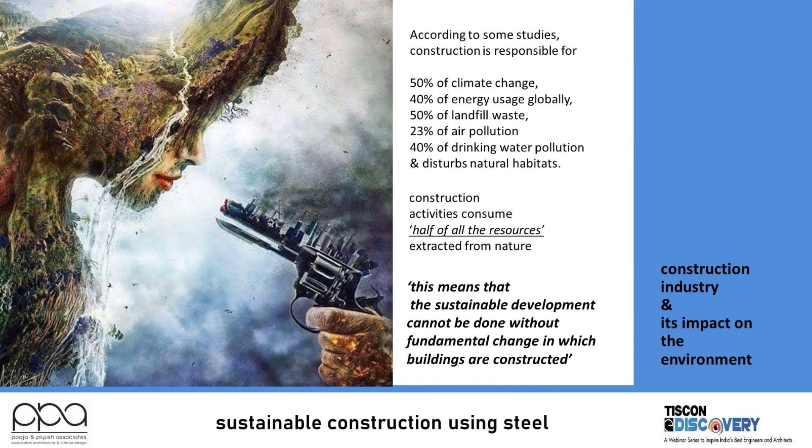According to some studies, building construction is responsible for 50% of climate change. More than 40% of energy is used by buildings globally. Buildings generate as much as 50% of construction waste that ends up as landfill. Construction activity creates 23% of air pollution, pollutes 40% of drinking water, and disturbs natural habitat. Moreover, construction activities consume half of all natural resources extracted from nature. This means that sustainable development cannot be achieved without a fundamental change in the way buildings are constructed.

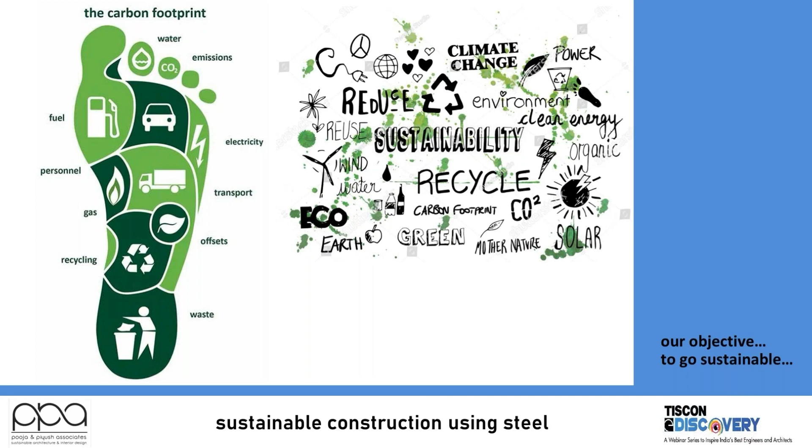Today, I am delighted to inform you that we at Pooja and Piyush Associates are leading our way in developing a more sustainable construction industry. Our objective overall is to reduce the carbon footprint of buildings. Let us examine the three biggest challenges for the construction industries in India. Number one is shortage of labor. Workers in construction are aging out and retiring at a faster rate.

The younger generation is not coming due to urbanization, as one can also earn a living without undergoing much hardship. The labor shortage has reduced productivity. Workers do not have the skill nor the experience needed. Contractors and builders try to do more work with fewer workers, which affects the quality of workmanship and productivity.

Second factor is safety. The number of workplace injuries and illnesses have remained constant for years. Keeping workers safe and protecting them against accidents and injuries should be top priority for all business owners. Post-COVID, workers and workplaces need additional care, and their health and hygiene have become a priority.

Third, what we see is the construction industry as a whole is very slow in adapting to new technologies. Companies that are early adapters and are implementing new technologies are going to have a noticeable advantage over those who don't. This is all resulting in delayed construction, increased cost, and further complications. So how do we build?

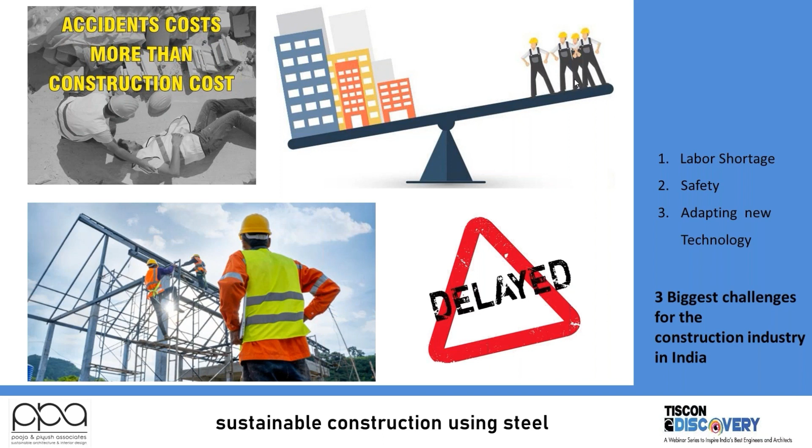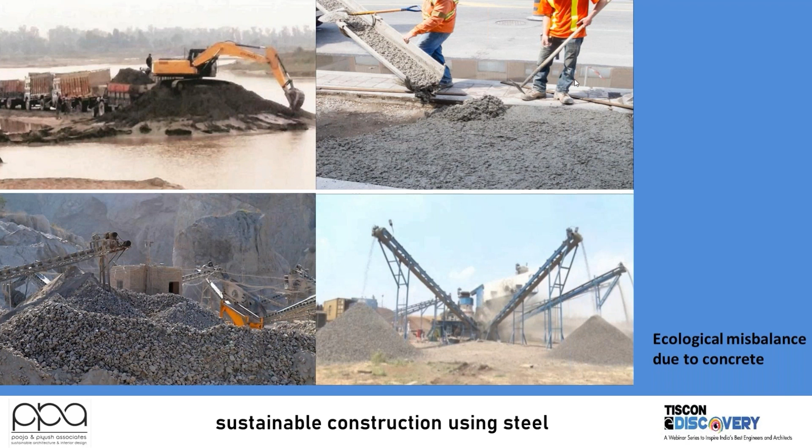Unfortunately, concrete is not an environmentally friendly material, either to make, to use, or to dispose of. A lot of energy and water is used to gain raw materials to make concrete. Quarrying of sand and aggregates causes environmental destruction and pollution. Today, we are witnessing constant delays in handing over sites due to either labor issues, raised cost of construction, or shortage of material supply at times.

So how do we build a structure that is eco-friendly, ecological, sustainable, beneficial and non-harmful to the environment, and resource efficient? Building vernacular, apart from bamboo, precast concrete, reclaimed wood and adobe, steel today has emerged as a sustainable material.

Presently, human civilization has entered the fourth generation of innovation: discovery of machines in the first phase, discovery of electricity in the second phase, and discovery of internet in the third phase. In the present phase, some innovations of advanced technology already popular abroad could be well suited for application to the Indian scenario. Steel-concrete composite design and construction method is one such method that combines the beneficial properties of both steel and concrete.

Here, concrete is optimally used, thereby reducing the material cost and saving construction time. Steel is one of the best materials used in construction for buildings to withstand extreme forces like strong winds and earthquakes. In combination with concrete, steel can be used for columns, beams, deck slabs, as well as staircases to make the entire building.

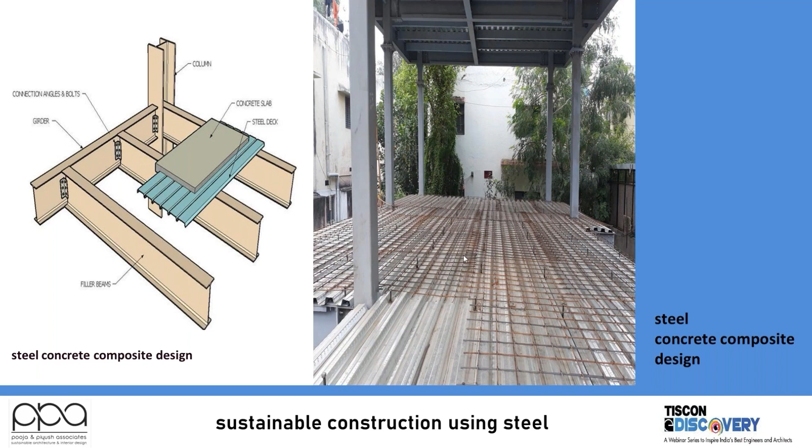Steel is tensile. It has high strength to weight ratio, which means it has high strength per unit mass. So no matter how long or large the overall structure is, the steel sections can be small and lightweight, unlike other building materials. Steel can be easily fabricated and produced massively. Steel sections can be produced off-site at the shop floor and then assembled on site, which saves time and increases the efficiency of the overall construction process.

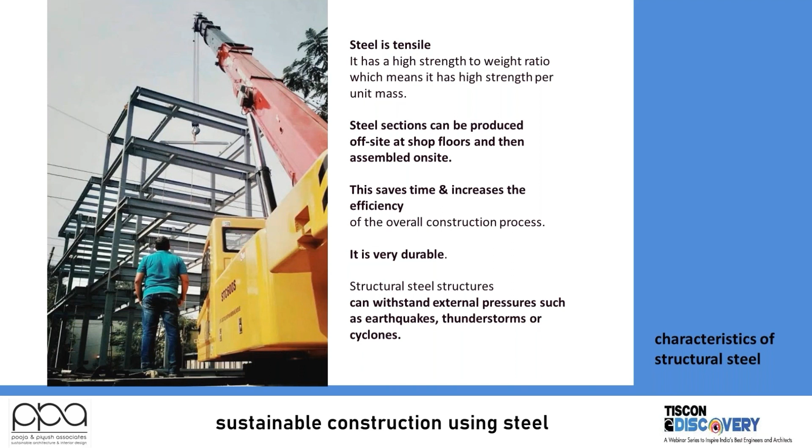Structural steel is very flexible. You can mold it to any shape without changing its properties. You can convert it into sheets or turn it into wires as per the design. Structural steel is relatively cheap compared to other building materials, and hence it is very durable. It can also withstand external pressures such as earthquakes, thunderstorms, and cyclones. A well-maintained structure can last more than 60 to 80 years.

We have reliability. The nature of steel is industrial, which offers speed in construction, uniformity, durability, high performance, elasticity, ductility, and warning before failure. Steel structures always give a warning - they will either bend or they will sag. So they always have a warning before failure.

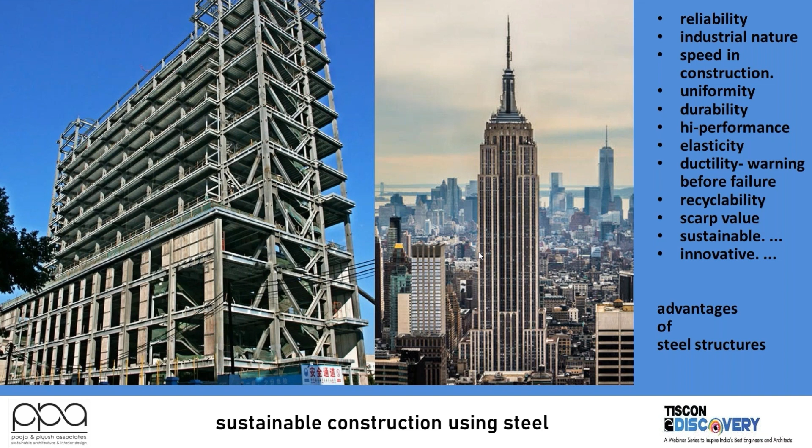Steel material is recyclable, so there is a recyclability factor and you always have a scrap value to it, and this makes for a sustainable and innovative advantage to all steel structures. Sustainable construction is a part where you see the structure's impact socially, environmentally, and economically, and in all three factors, steel is compatible.

However, there are some limitations in steel structures. We have to complete the entire planning, and additional time goes into design. The time required to design connections is more as compared to RCC structures. Cost is high for structural steel as compared to concrete structures. You require skilled laborers, and extensive fireproofing cost is involved as steel is not fireproof.

Nowadays, JSW has come up with fire retardant steel as well. In high temperature, steel loses its properties and can soften and melt with exposure to extreme temperature.

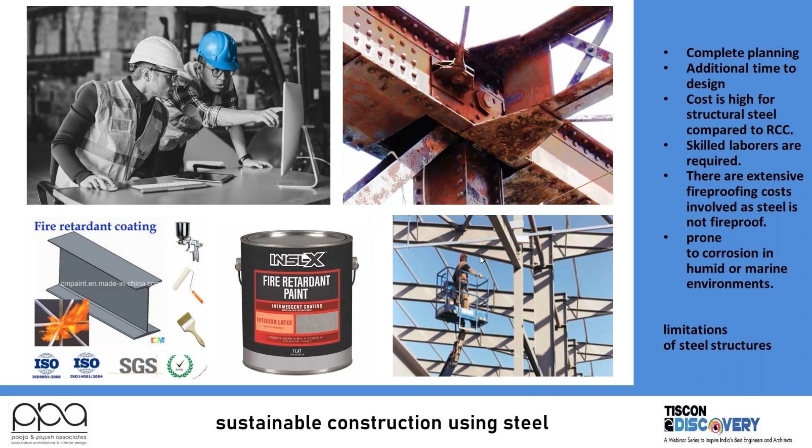As the old saying goes, time is money, it was never more true than when we talk about construction schedules. In any construction, economy and time are crucial factors, and as per building needs, the method of construction is decided, whether RCC or steel structure. I will be presenting a few case studies.

It is a house for two brothers where we had to create a minimal house that used innovative construction technology, where the use of material is showcased in its true form. It's ecological, sustainable, and climatically responsive. Above all, it had to represent or showcase an architect's own house.

Thus, the design concept started with a search for a perfect building and a meaningful house with more meaningful spaces, in search to be true and pure. We have this as a plot with two sides roads.

The entire design was as per the sun path diagram, where you see the movement of the sun. The wind direction in the daytime is from the northeast, whereas in the evenings it is from the southwest.

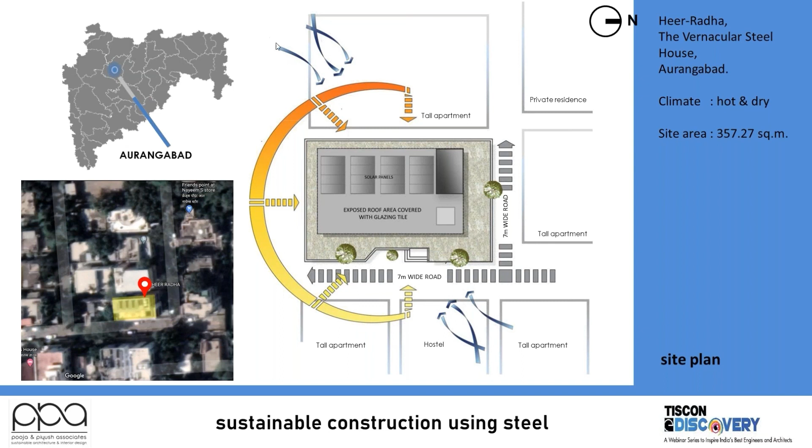The plan was an effortless, simple rectangle with relaxed spaces and non-defining spaces. It was minimal on material, be it for construction, interior, or finishing.

We have a rectangle with a staircase block on the northwest side. The living or public areas, which have the living room, kitchen, and dining area, shown in yellow, are on the front, eastern side, and the private bedrooms are on the western side.

The entire house has a veranda, balcony, or terrace on all four sides. These are the green spaces or buffer spaces, which act as buffer zones.

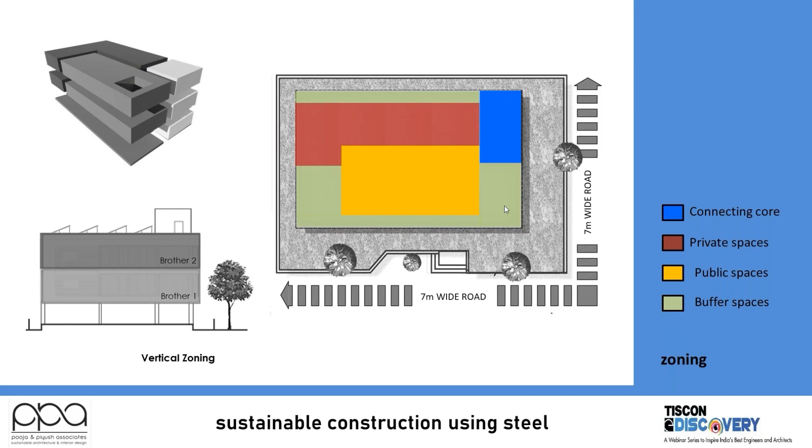The entire plan is a rectangle. You have the living room, dining, and kitchen on the eastern side, with balcony spaces, and you're greeted with an open terrace. All the bedrooms are on the western side, where you get the wind flow.

There are no internal walls. The furniture becomes part of the structure and divides the spaces between the bedrooms and living rooms. The orange blocks that you see are hollow clay blocks, which insulate the entire house from exterior weather conditions.

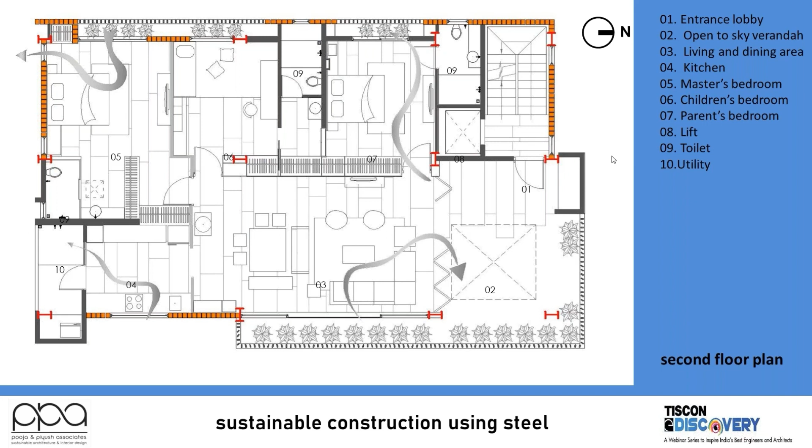In search of innovative building technologies, the steel composite structure was a strong magnet, the first of its kind in this region. The conceptual development revolved around the mixed use of vernacular materials with a steel composite structure.

The entire structure was erected in 5 to 7 days, and later we cast the slabs on each floor. So the entire building was completed in 2.5 months.

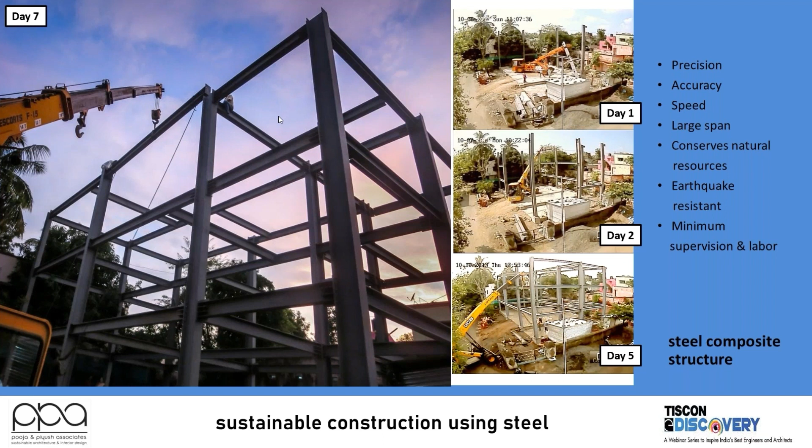These are a few shots of the steel composite structure while the erection was happening. All the members were fabricated in the factory and assembled on site.

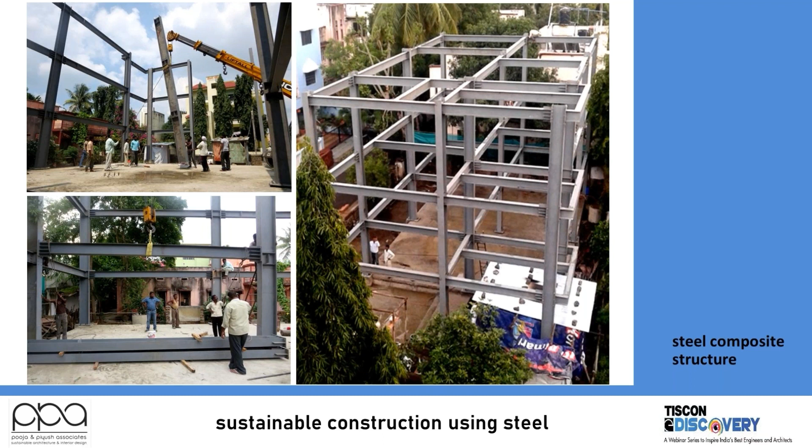The speed of building, flexibility, large spans for spaces, precision in work, and conservation of natural resources, construction material, human labor, and energy were a few strong advantages of the composite structure over conventional ones.

This is the front elevation of the entire building. These are the aluminum fins that you see in the front. This is the northeast elevation.

From northwest to southeast, we have the clay blocks, which insulate the entire building from harsh weathering conditions. The aluminum fins not only obstruct the view but also create a tangible elevation. They offer privacy, reduce glare inside, reduce the radiation of the sun, and replace conventional grills.

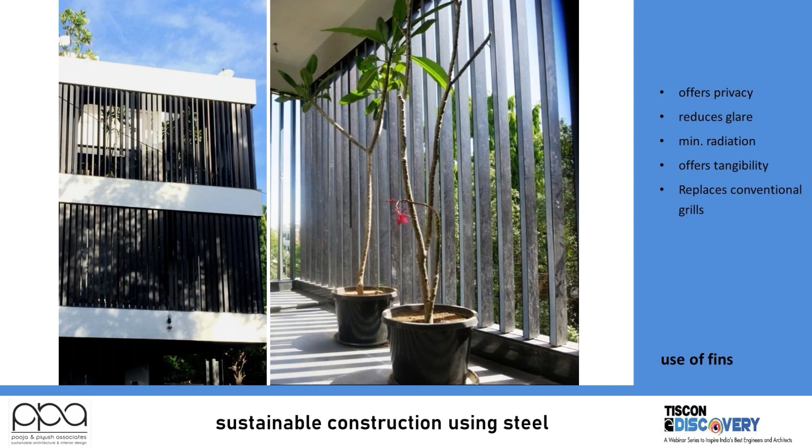The clay blocks are used for the external walls. They have high compressive strength, good thermal and sound insulation, are 100% natural and sustainable, durable, cost efficient, and low on maintenance.

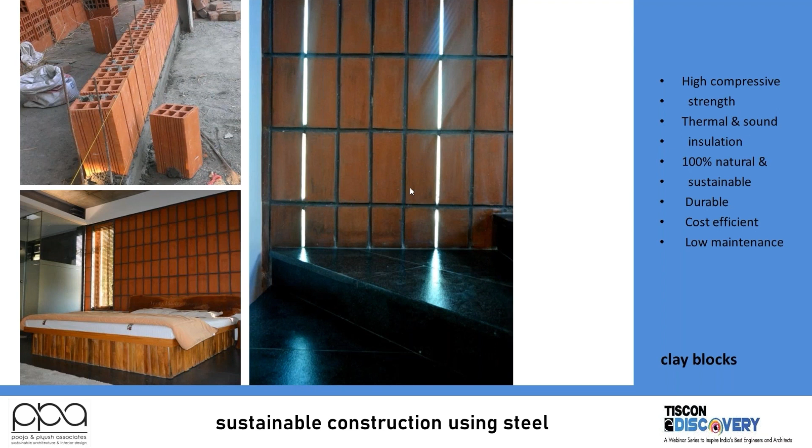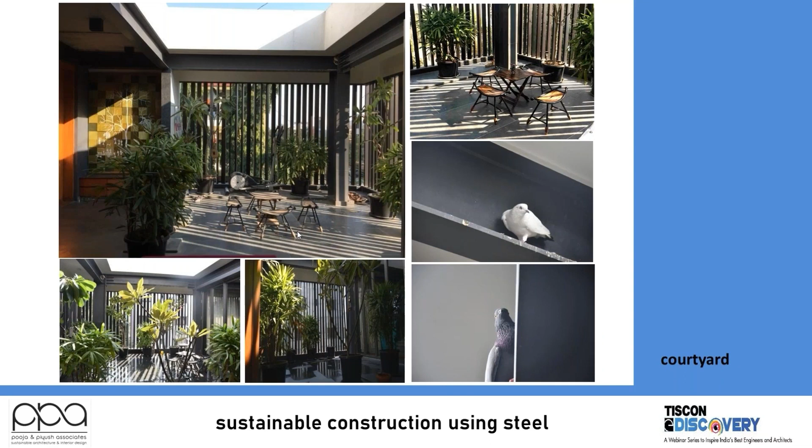A few shots of the interiors, where you see the space becomes one and interacts with nature. This is the entrance courtyard, which brings in light and nature inside.

After designing this entire house, the innovations we saw: we did not have any lintels, chajjas, or grills. There was no false ceiling. There were minimum walls, minimum plaster, and we saved almost more than 55% of natural resources as compared to a conventional RCC building. The total ventilation achieved was almost more than 86%, which saved almost 25% of electrical energy also.

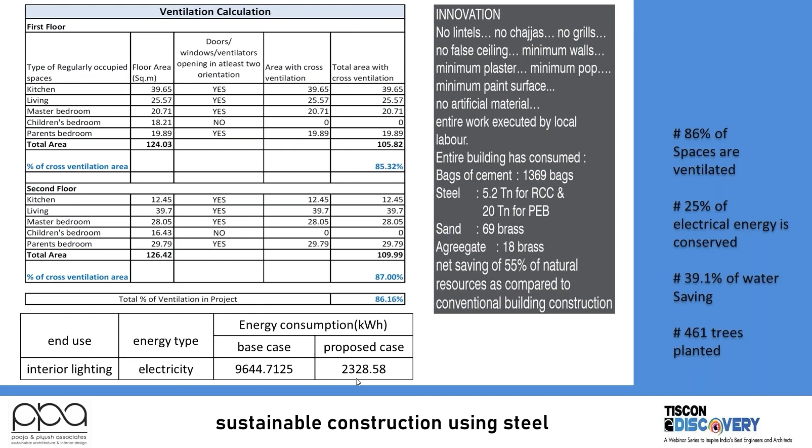The second structure is the Nuts and Bolts house at Aurangabad. This house was designed for a family, for an LIC agent who had bought a small plot of almost 2000 square feet in the heart of the city and wanted to build a small house with basic requirements of 3 bedrooms and a home office. The one thing he aspired was to build fast.

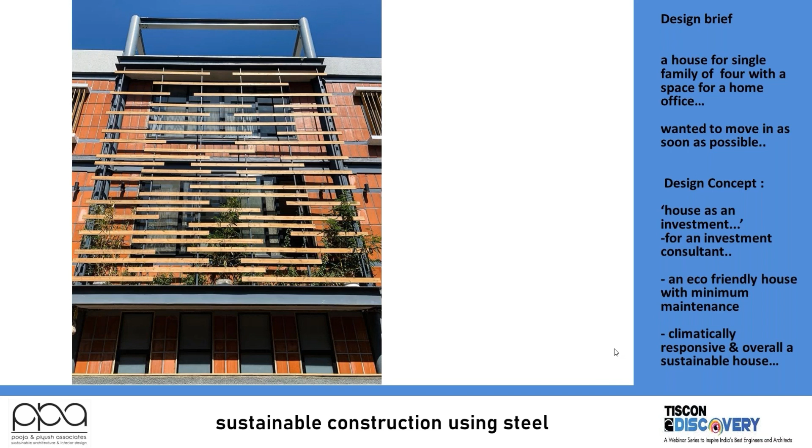This house was designed for 3 floor plates of 1000 square feet each with an open plan. Since the house was for an investment consultant, we proposed to build it in steel. Again, we followed the basic principles of climatology: a north-facing plot with roads on 2 sides.

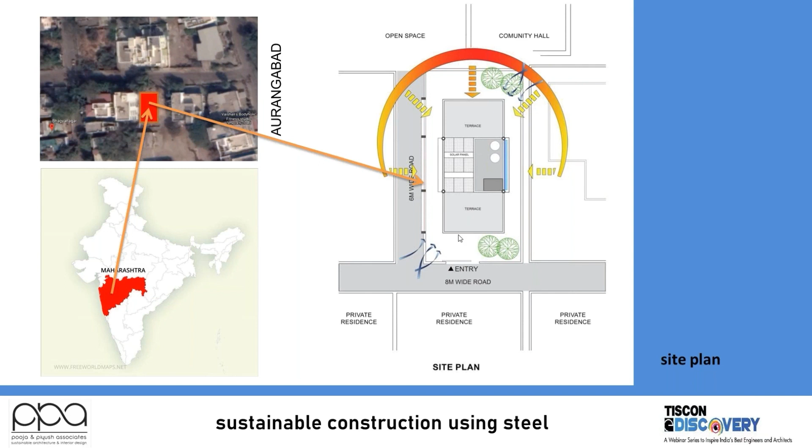So the sun path was like that, and the orientation of the building is north-south. On the eastern side, if you see the zoning, we divided the entire building into 3 zones: the bedroom zones and the living zone in the center. The living area in the center becomes the dynamic space, so there is no circulation space wasted. All the west is covered with services to insulate the entire building. The utility, toilets, lifts, and staircases are placed on the west, whereas all the living areas are placed on the east to get natural light.

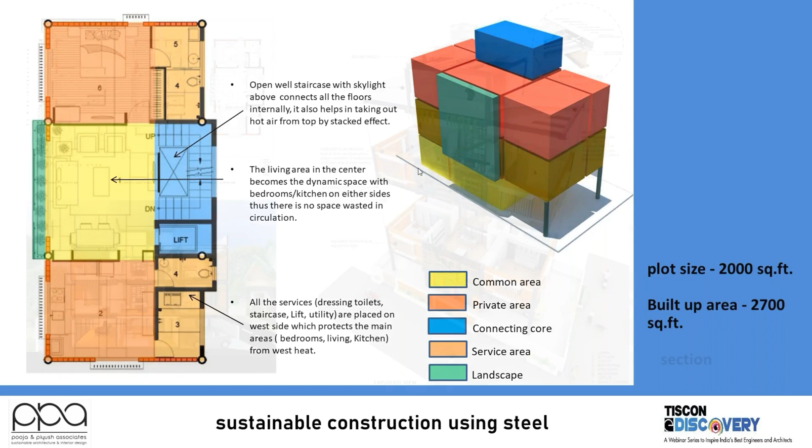The building is divided into 3 floor plates. On the ground floor, we have a formal living room with a home office. On the first floor, we have a living room with the parents' bedroom and kitchen dining. And on the second floor, we have 2 bedrooms with a family lounge. The staircase connects all the floors together with a skylight above, which exhausts all the hot air from the top.

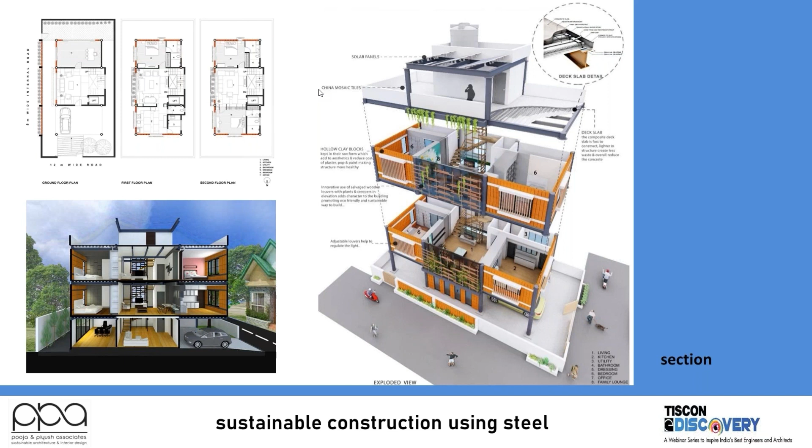The aim was to create architecture that would offer natural and healthy living spaces, that would be maintenance free, that would be built with maximum recyclable materials, and that would reduce the environmental impact.

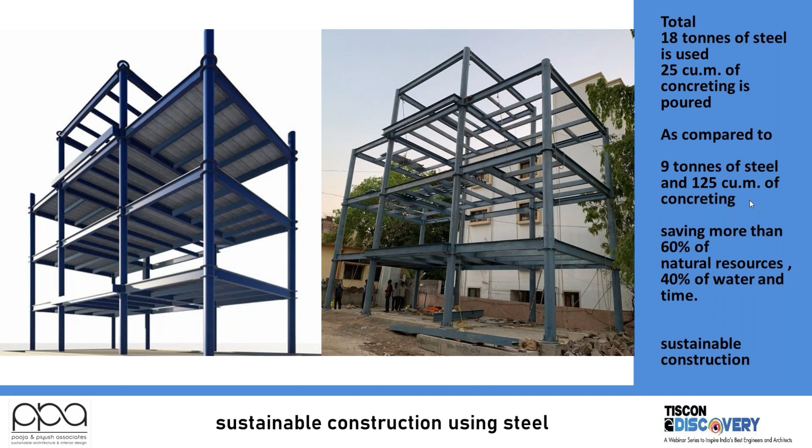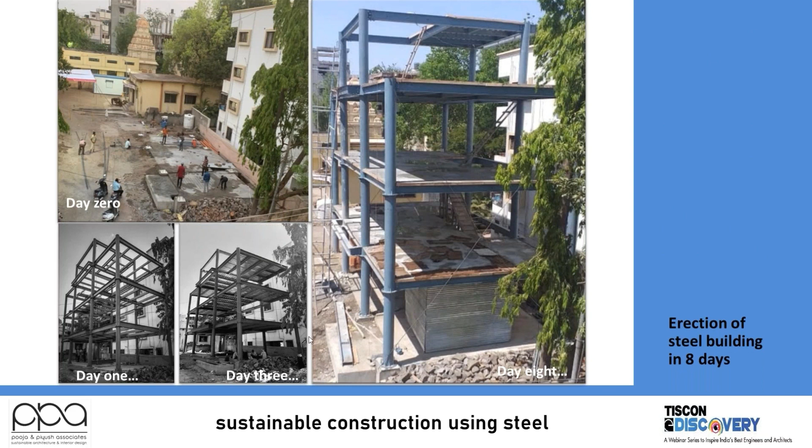On day 0, the plinth was erected. On day 1, you see the entire structure erected. On day 3, the entire structure was erected, including the deck sheets. And after 8 days, the entire structure was completed, including the slab.

The use of composite deck slab was used here, unlike the previous residence which was built almost 8 years back. So here we incorporated deck sheets, which offered speed. It was light in weight, thus reducing the weight of the building. It created less waste and was overall cost effective.

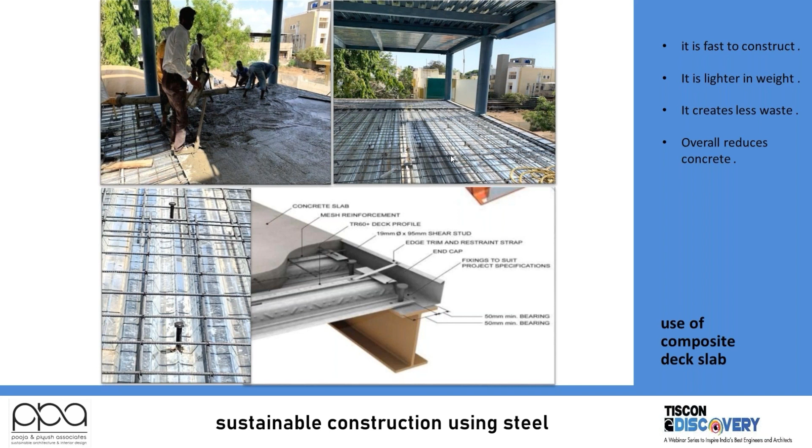Connection details of the structures were worked out in detail and incorporated looking at the interiors as well. This was the first ever such structure built in our region, and the design was again truthful. The design language was to create architecture that showcases its true form, whether color or texture, without adding any artificial layer.

The clay and steel with wooden louvers and green plants complemented each other and added a new vocabulary to the building. The external walls were designed with hollow clay blocks that created a temperature difference of almost 5 to 7 degrees, keeping the interior cool in summer and warm in winter. The vertical pattern of the blocks gave rich character to both interiors and exteriors.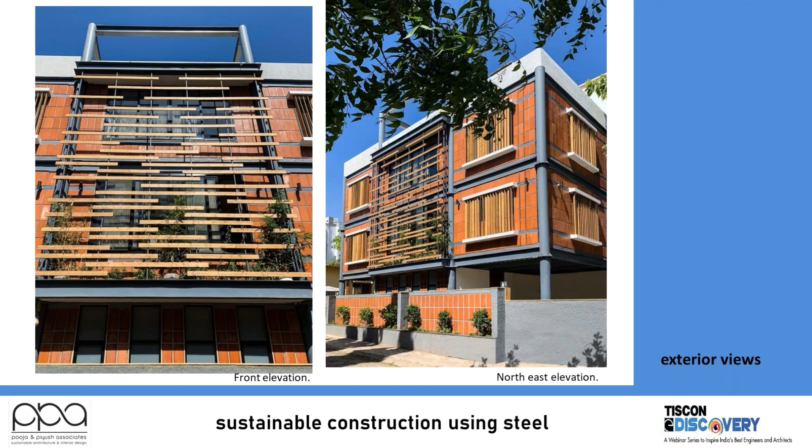The conventional grills were replaced by salvaged wooden louvers that helped regulate the light and connected you to nature. The interiors were designed with a color palette of natural materials. The terracotta walls, exposed deck floor with rafters in ceiling, and leather-finished Jaisalmer floor all showcase the concept of the design: to build and be pure. The furniture units were made out of MDF and PVC ply and painted in white and grey tones.

The open well staircase connected all 4 floors, and the green envelope added a unique character to the building, promoting an eco-friendly and sustainable way, offering a healthy lifestyle to the occupants.

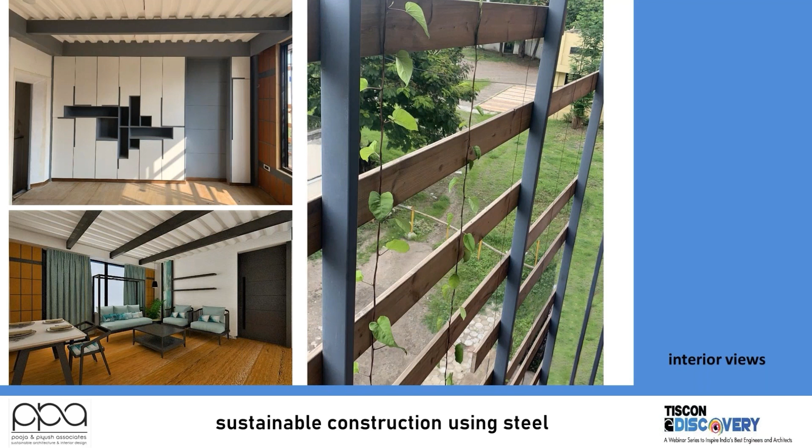I would showcase a few ongoing projects now. If time permits, I would show the time-lapse video of the bungalow that we erected, this nuts and bolts house. This is a residential and commercial building at Bajarang Chowk.

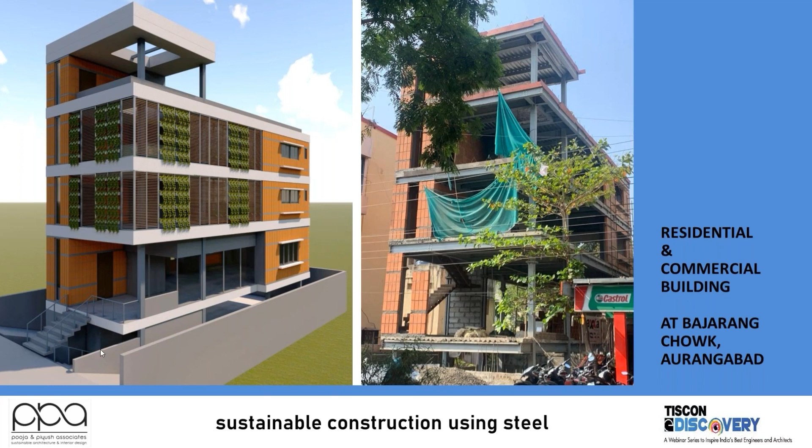Here, the 2 floors are commercial while the 2 floors above are residential. This is the ongoing site in Aurangabad itself, again almost on the same lines and same principles as the 2 houses. The 5 floor slabs that you see here are cast in a single day.

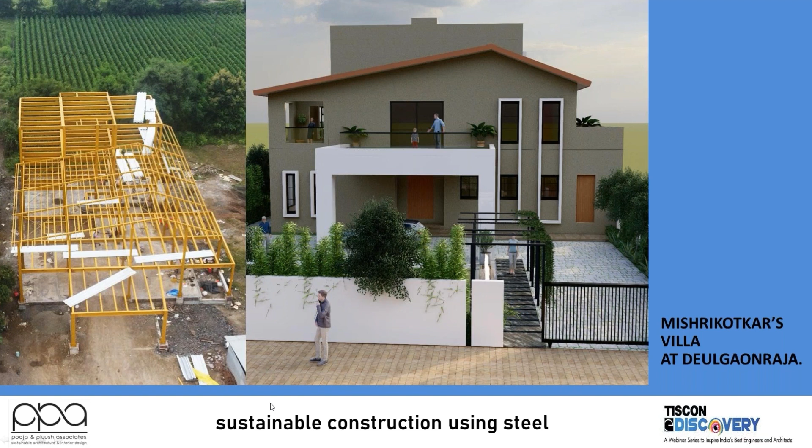This is the Mishrikotkar's villa at Deulgaonraja, almost a 15,000 square feet residence. Here the client did not want the steel structure to be seen, so all the external walls are in AAC blocks, aerated concrete blocks, with cavity walls, and the entire steel sections are sandwiched between the structure.

This is the plan where you have the living areas in front and the private areas on the rear side, with a courtyard and a puja room in the center. On the first floor we have 2 bedrooms with a home theater and a guest room with terraces, and on the top floor another daughter's bedroom.

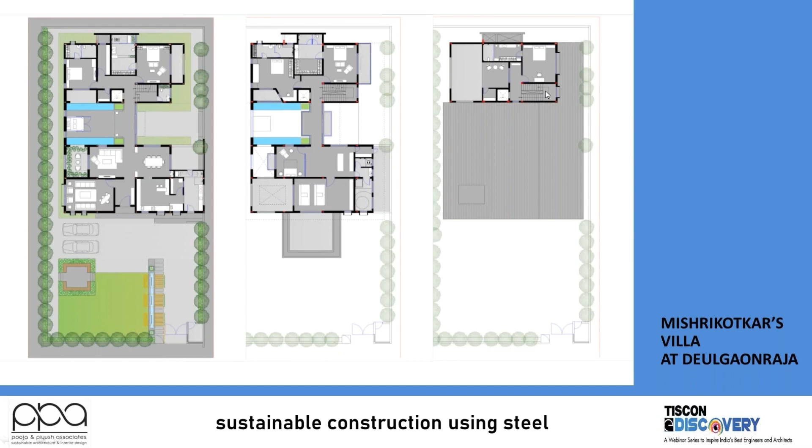This entire structure was erected in 2 weeks. The top floor has a sloping roof with Mangalore tiles on it. Here you see the cavity wall in between which insulates the entire house, and this is how the entire steel is enclosed, protecting it from all weather and not giving an industrial look to the building.

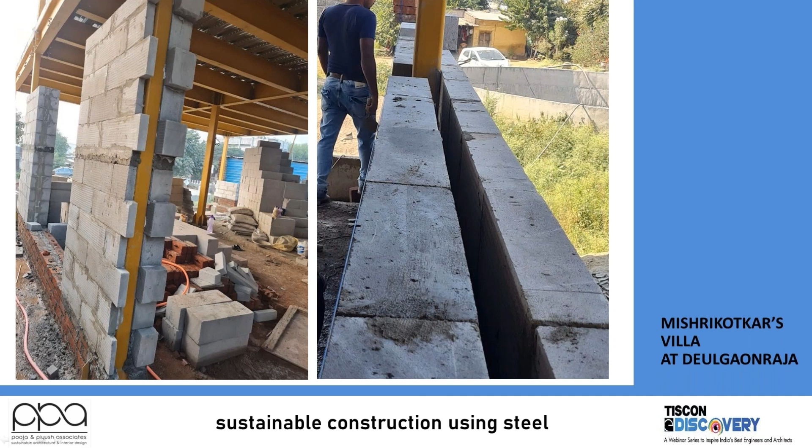This was like a villa. The entire design is as per the villa concept.

We also did a few projects. One of them was labor quarters at Gangapur, erected in almost 1.5 days. The entire steel used was hardly 3 tons, and we were able to construct almost 8 units.

After seeing the development, the client ordered another bay, so we erected this bay as well. Opposite to each other, 16 bays were all completed.

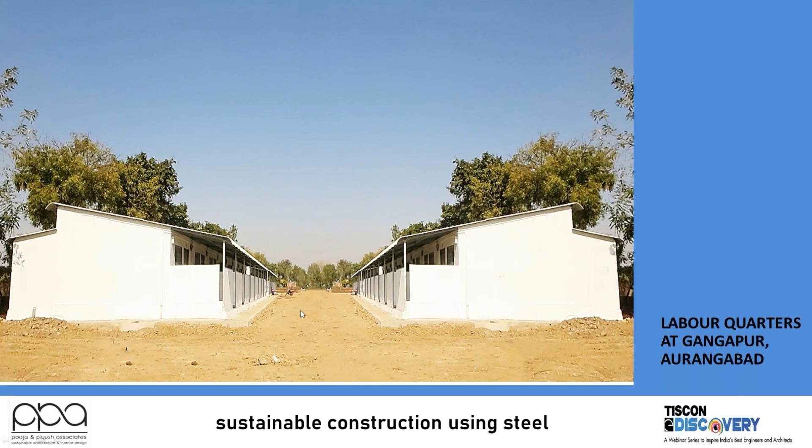Here we have all Aerocon blocks for the partitions. All these internal walls are erected in Aerocon partition, and we have a regular tin shed with a skylight, so the entire house is ventilated. You have a kitchen, an OTA, the living space, and the utility and toilet on the rear side.

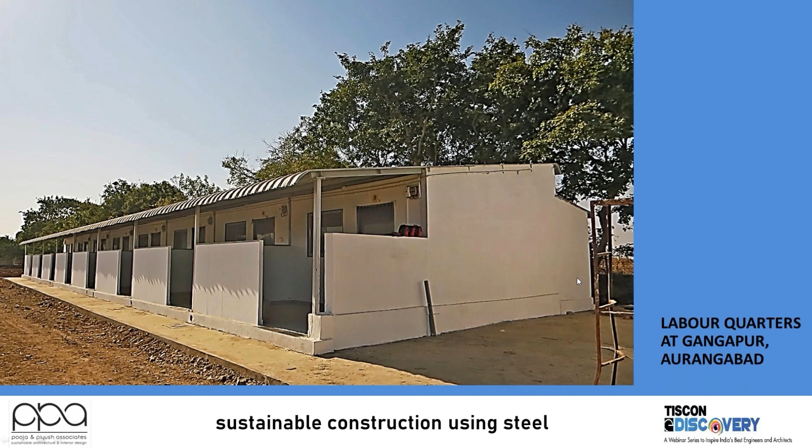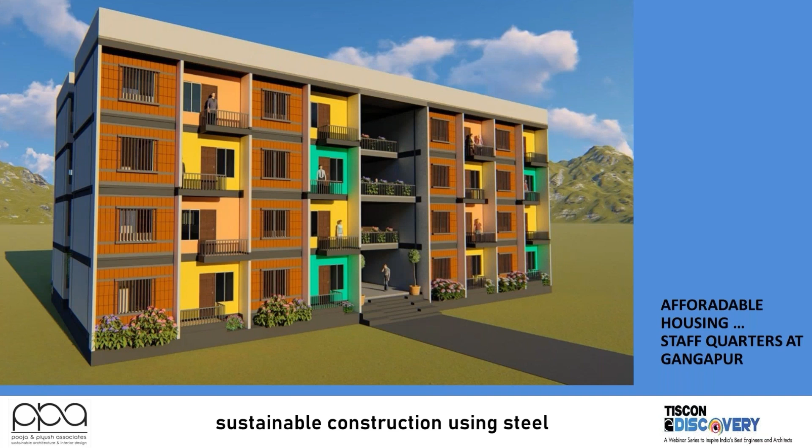Affordable housing for staff quarters was also worked out. Here we conserved, again, in this 25,000 square feet construction, saving more than 50% of natural resources.

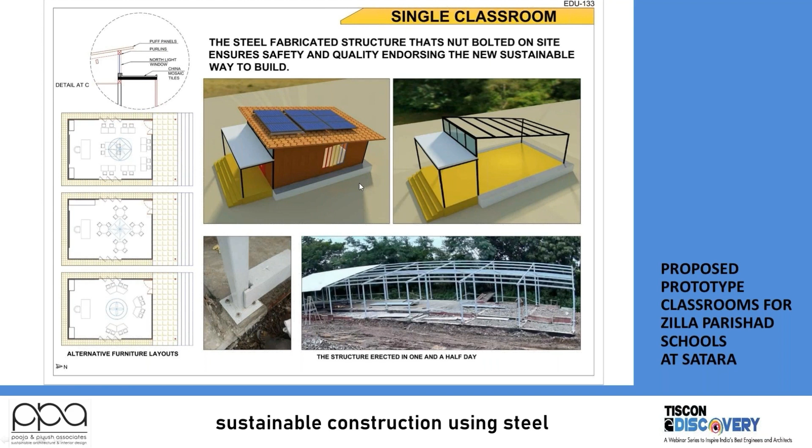We proposed the classrooms for Zilla Parishad schools at Satara on the same principles, where you can create a cluster of one shell with a veranda and a classroom with natural light coming inside.

For the first time, you see in the human psyche that we are adaptable to change. It would be interesting to see how we respond and how things move and transform from here again.

I hope to see a new tomorrow where we don't only design buildings, but we design communities. Let us dream to build healthy and livable cities that have clean air and less traffic, ones that are easy to commute, on bicycle or by walk.

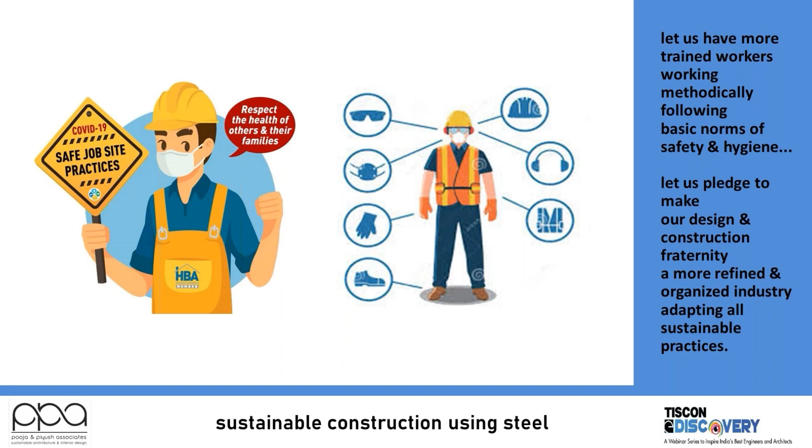Let us have more trained workers working methodically, following basic norms of safety and hygiene. Let us pledge to make our design and construction fraternity a more refined and organized industry, adapting to all sustainable practices, and let us change our preferences to materials and act responsibly. Let us do less, reduce the carbon footprint, and have a conscious approach.

If possible, I can run the video of the time lapse. Yes, Piyush, please go ahead.

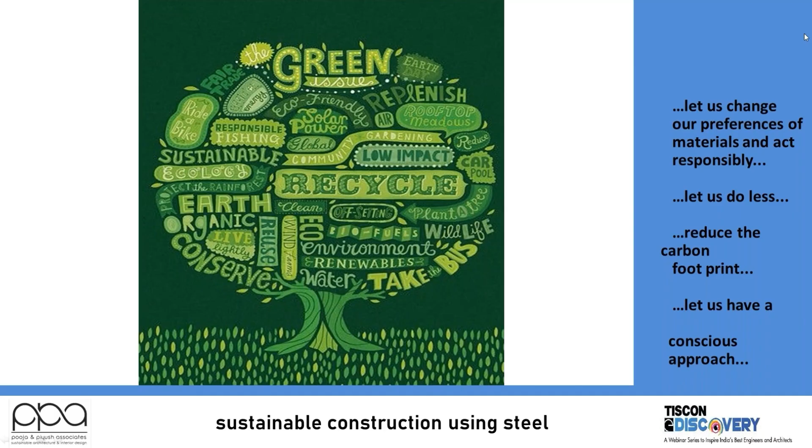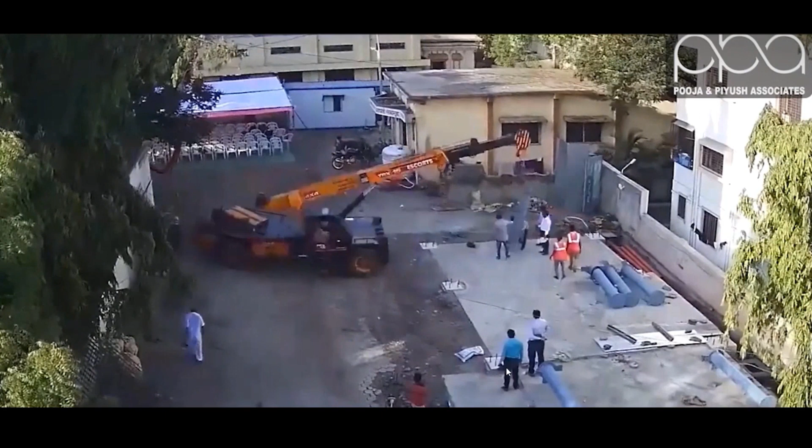So this residence was constructed in hardly 8 days. This was the plinth that was erected, and we had the anchor bolts already done on the site. On the first day, all the columns were erected, and all the beams were also erected.

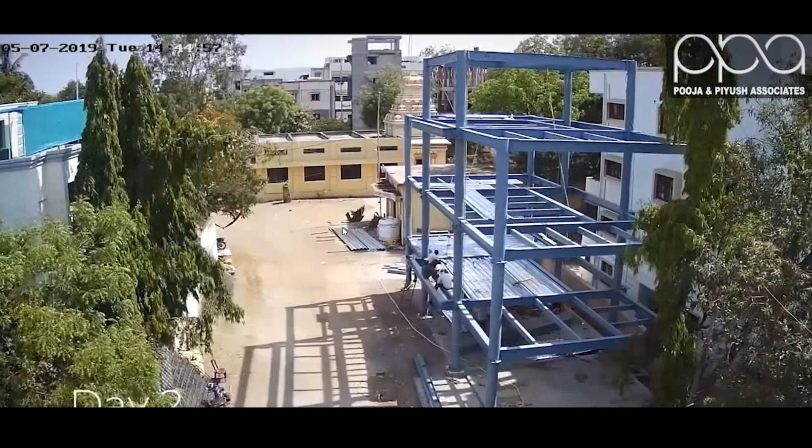Since we had two roads, there was freedom of accessing two cranes. These are the deck sheets that you lay on the structure. Circular columns were used because the entire structure was exposed, and we did not want to hide the columns.

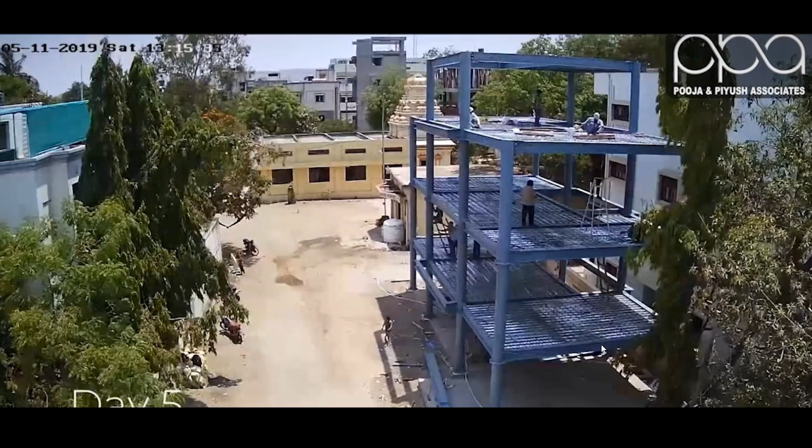We had basic reinforcement laid on the structure, then electrical conduits and all service lines were laid. The last 2 days were kept for alignment of the structures, strengthening, and tightening. And here is the ready-mix concrete van that comes and pours concrete.

So the basic advantage you see in these kinds of structures is there is no debris on the site. There is no sand, there is no aggregate, there is no wastage of cement.

The first slab is completed, then starts the second level slab. All 4 level slabs were casted in hardly 3.5 hours. So the mental stress that one has to go through is very minimal. That's how the entire process was done.

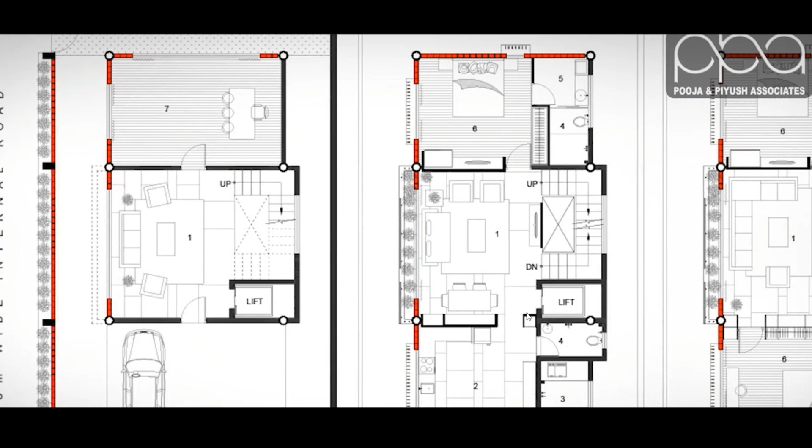And in the next 4 months, the entire interiors and the walls were all erected. So that's the floor plan that we see again, a closer view. Those are the 3 bays, so you have a parking.

So it's time to change and adapt to sustainable ways to build, and we are doing our part one building at a time.